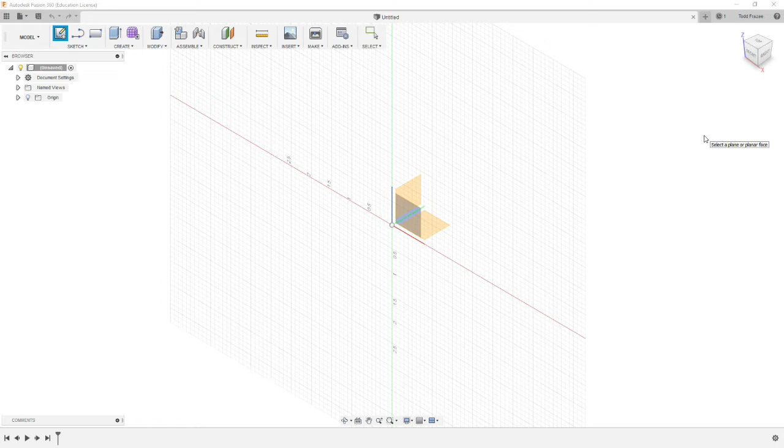I'm going to go ahead and select the top view, which should be this bottom plane here. Your sketch plane is going to go parallel to what you selected by default. You can still rotate around, and a sketch palette should appear here.

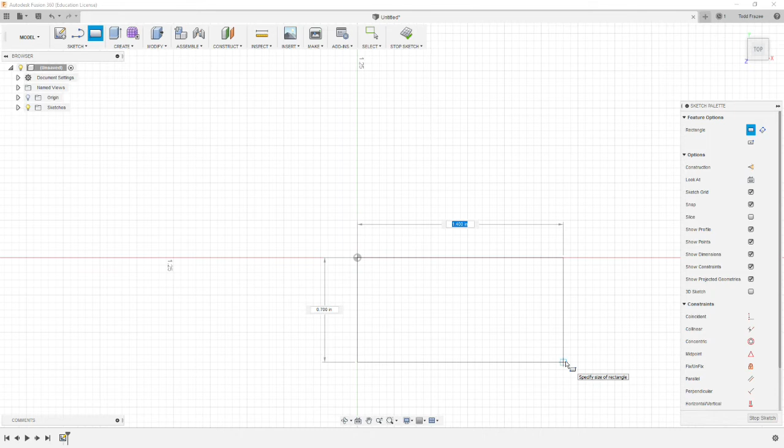We're going to go up and use the 2-point rectangle tool, and we're going to select on our origin, which is here. Our origin on our Cartesian coordinate system would be 0, 0, 0 in the XY plane. We're going to select right there for our first point, and then we're going to drag over for our second point, so it creates a rectangle.

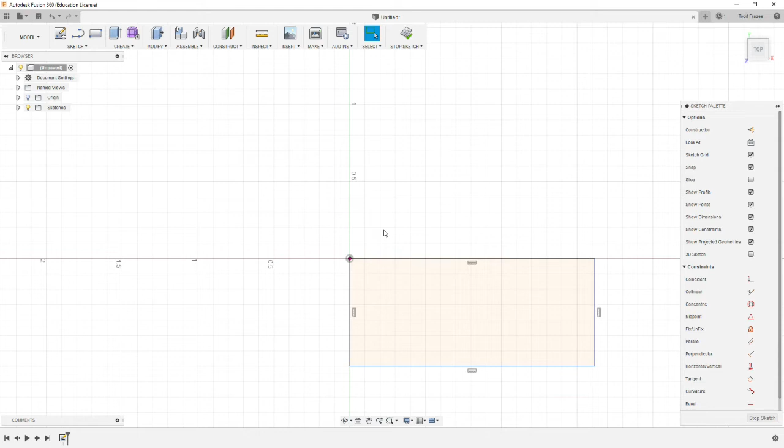Now that we've done that, you can see that 2 of the lines are blue and 2 of them are black. What black means by default is the geometry is constrained or fully anchored. So because I picked on the origin for the corner, these 2 lines are static and the blue segments are still dynamic. It is best practice to have fully constrained sketches before you go on.

Everything you make, if you were to reopen this sketch and move it, your entire model is going to change size. To do so, we are going to go to the sketch menu, and we are going to select sketch dimension.

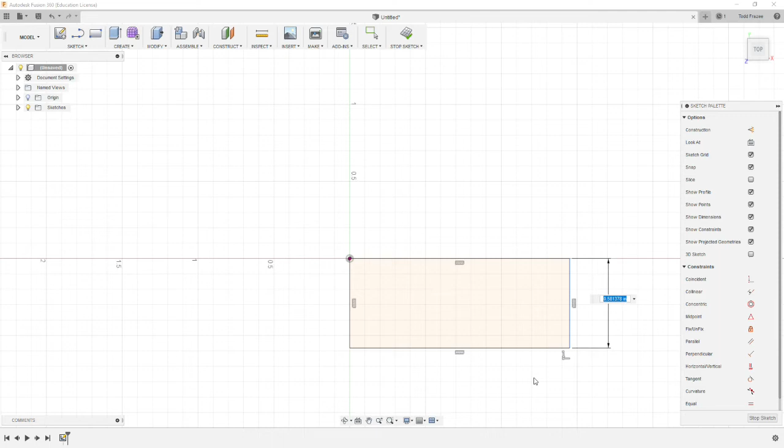You can also use the hotkey, which is the letter D on the keyboard. We are going to dimension, in this view, what would be the height and the width. Our drawing says that the height should be 1.9 inches, so we type that in, press enter, and then select the other dimension. Our overall length was 4 inches, so we type 4.0 and press enter.

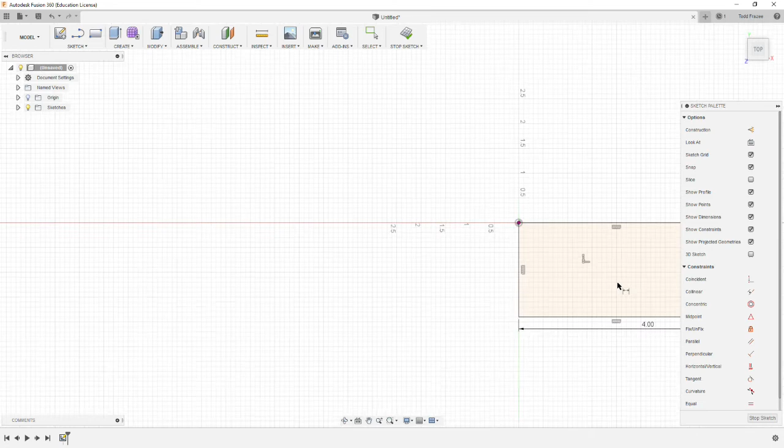If we zoom out, we see that everything, when it's not highlighted, is turned black. That means it's fixed. This dimension is 1.9 inches long, this one is 4 inches long. That's now defined, fully constrained.

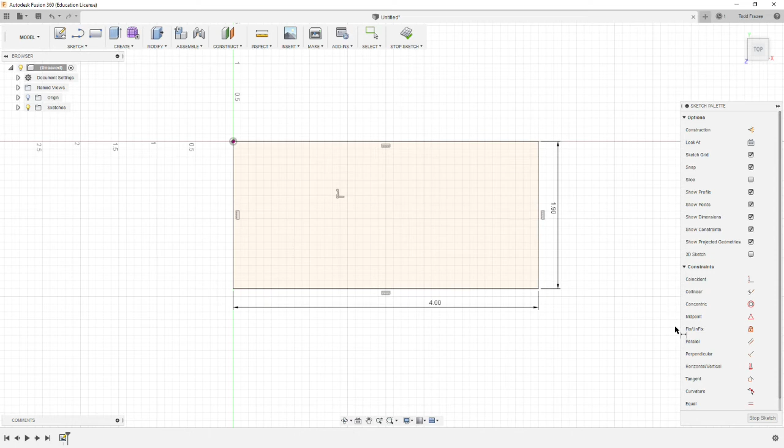Now we're going to select Stop Sketch. If we rotate the view, you have a sketch with a rectangle, and it shades a kind of beige or yellowish color when you have a fully enclosed entity. What we're going to do is take that entity and now extrude it to have thickness, because right now it has no thickness. So we're going to select this extrude icon.

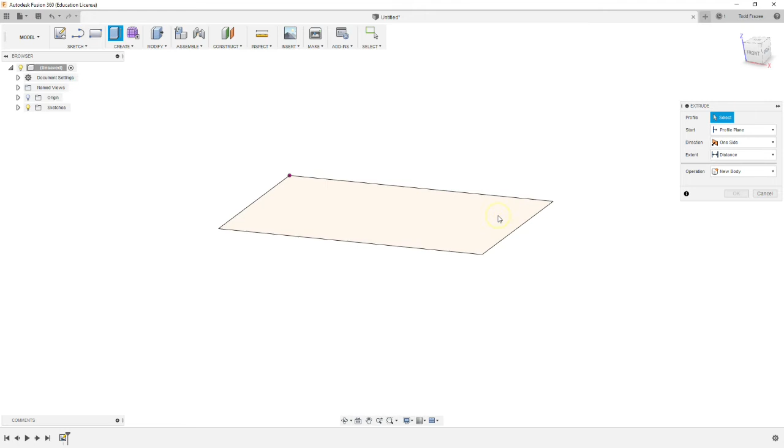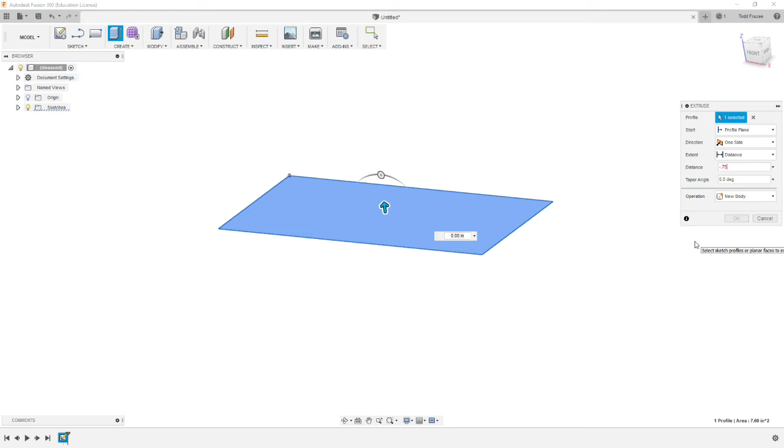If your rectangle wasn't already selected, select the boundary you want to extrude. We're going to leave start at profile, and our direction is one side of the profile, extruding by a distance. We'll leave those boxes at default. Our distance, because we're extruding down, which is the opposite direction from this arrow, and our thickness of the part is 3/4 of an inch, we type negative 0.75.

Okay, that gives it thickness. We could have also dragged this wheel around for different directions and back and forth for thickness. We want to make sure it says create new body, since we're creating a new entity, and select OK.

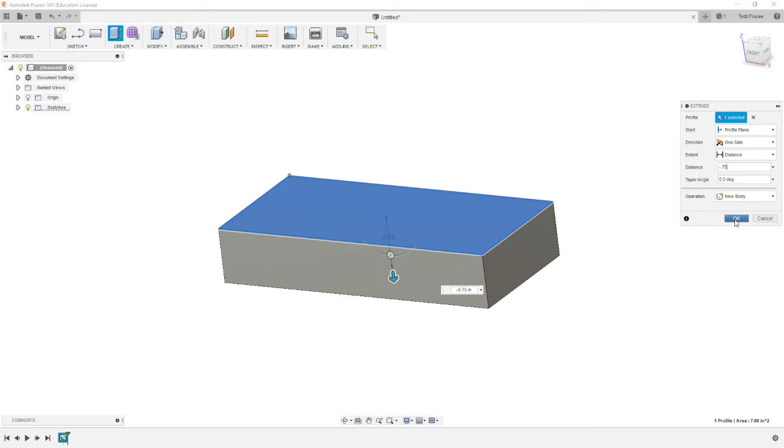Alright, you're about halfway through your first model. What we're going to do is put a couple features on here. Our drawing calls that the four corners here, here, here, and here have a 10 thousandths radius called out.

So to do that, we go to the modify menu and select fillet. Now technically these are rounds—fillets are concave, rounds are convex—but there's only one command to make this type of feature. So we're going to select fillet, or you can use the hotkey F on the keyboard.

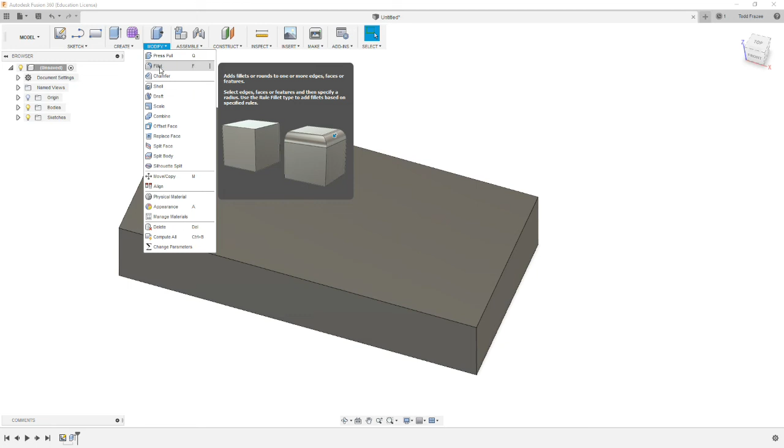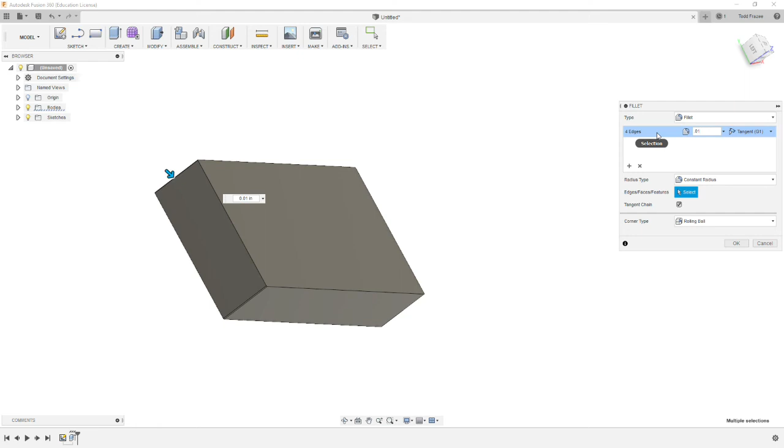It opens up this dialog box asking what edges you want to fillet. We're going to pick the four vertical edges that correspond with our drawing, and enter our fillet size in the box as 0.01 per the drawing, then hit enter. So we now have a small radius on each of the four corners.

Okay, our last feature to make is a 10 thousandths edge break. Now, a lot of machine shops would do this manually by hand. So on this particular project, on the exterior edges, I want your hand skills to be applied, so we aren't going to model the 10 thousandths edge break per the drawing. We will be putting that on by hand after we model the part.

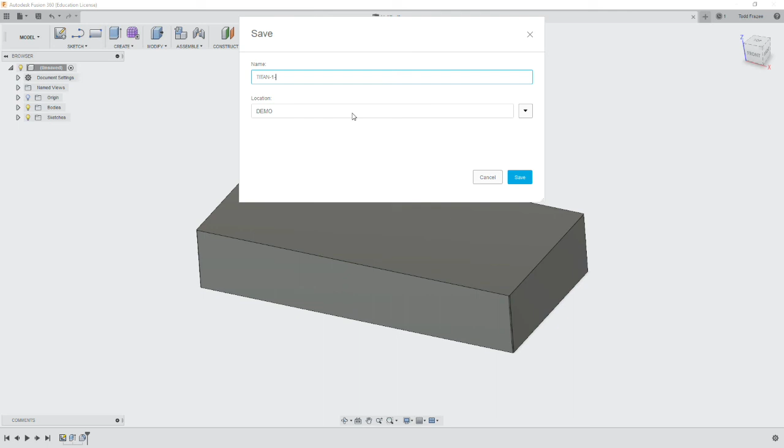We want to make sure that we've saved our part with the proper title, which is TITAN-1-1M. You're going to save that location in your Weld66 folder and hit save.

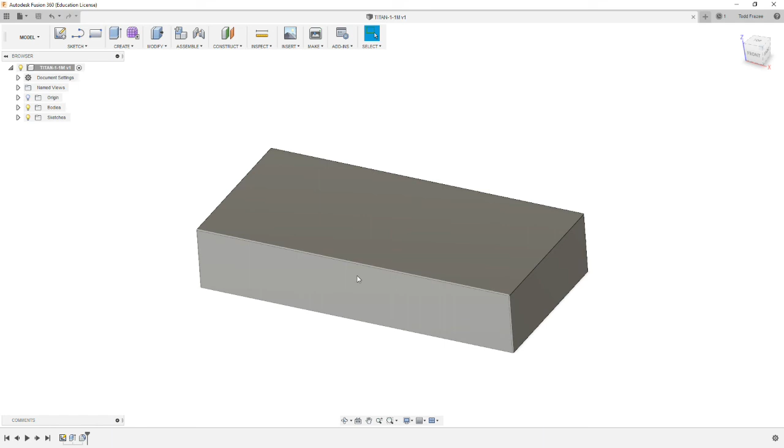Alright, and the title should update here. If we were to look in the data panel, your model should appear here in the data window. If you go to the data panel and go to your folder, which would have your name and Weld66 on it, you'll see it here, and it'll say TITAN-1-1M with an icon. Every time you make major changes and save, the version number will change. So this is the first time it's been saved, and in this case this model says V1.

Alright, and you can continue with the next project in your queue. This completes the lesson for the TITAN-1-1M configuration.